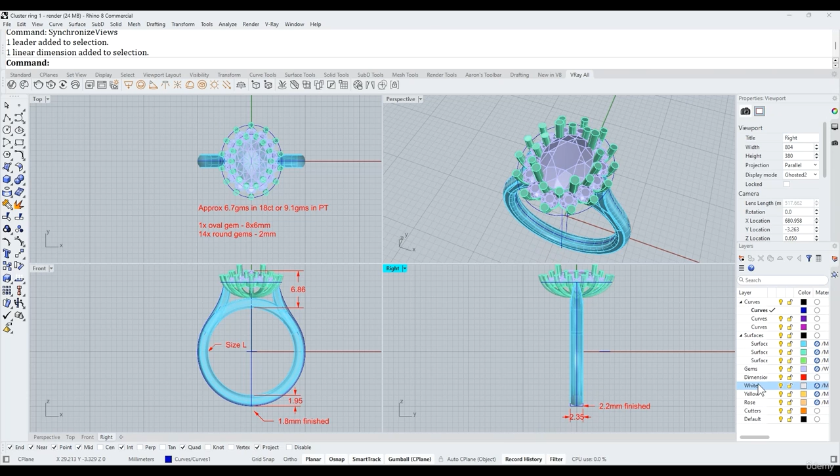I'm going to start by deleting some of the superfluous parts here, being these annotations. Let me select the entire dimensions layer and delete. There's a couple of curves here I'm going to delete, don't need those. I'm also going to delete all of the gems. Now the gems look like they're on the gems layer, but they're actually on the curves layer here, so I'm going to SelBlock. That's just going to allow me to grab all of those and delete them.

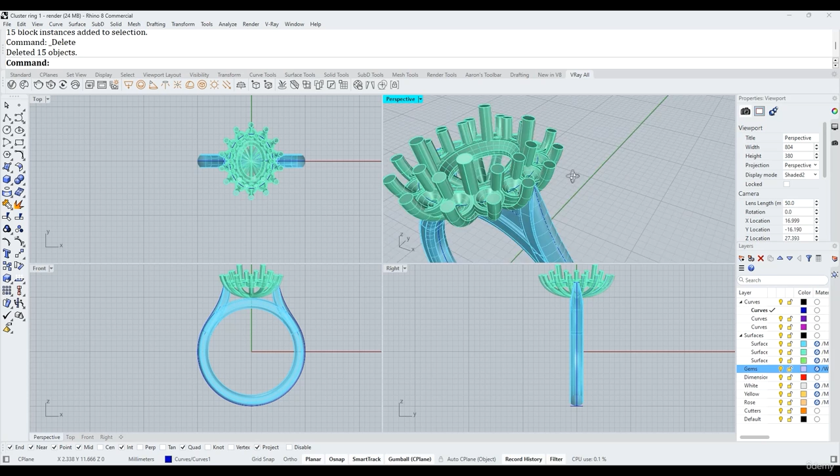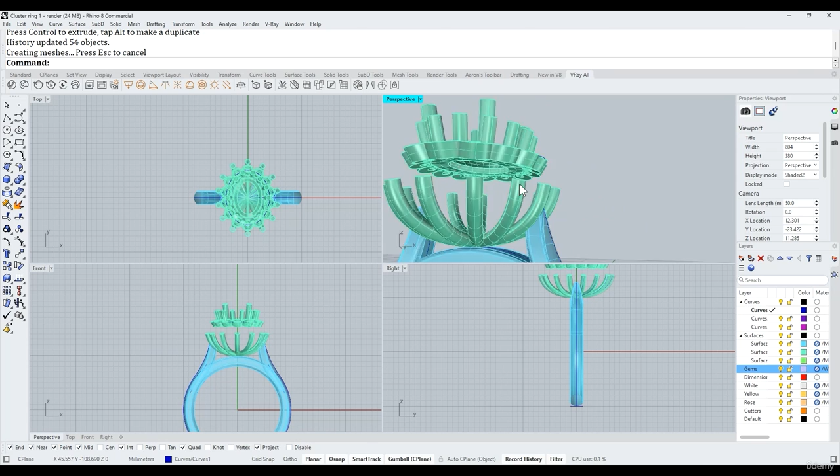So we've got two options here. We can either cast the entire head as one piece and the shank as a second piece, or we could cast everything as one piece, or we can cast the center cluster separately from the wire basket. This way you get a cleaner model, because you're able to get underneath here, you're able to polish up these areas, you're able to disc in between the claws and get a nice polish there. So that's the way I'm going to do it.

I'm going to bring that head back there. I will change the layer just so we can easily see what our three parts are going to be.

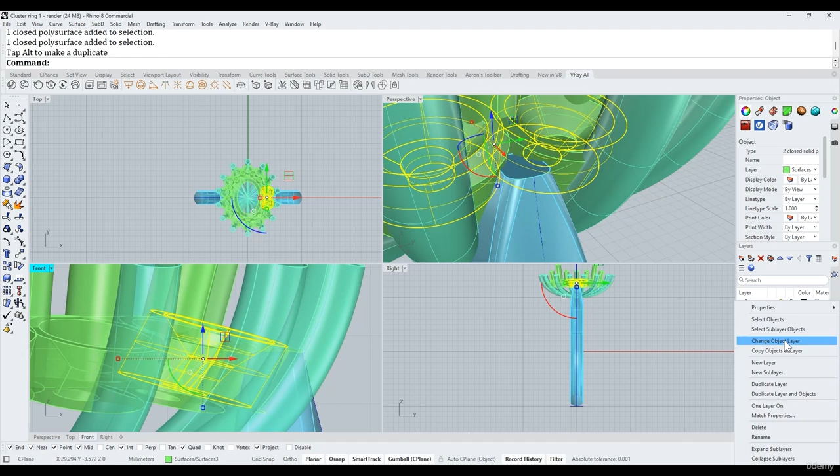Now the tip of the shank here, we do need to trim this back slightly. I'm going to select these two objects here, hold down Alt as I drag - you can see I've got a little plus mark there by my cursor, so I'm making a duplicate. I'm going to put this on the cutters layer, mirror that across to the other side, and then I can do a Boolean difference and delete away the orange cutters.

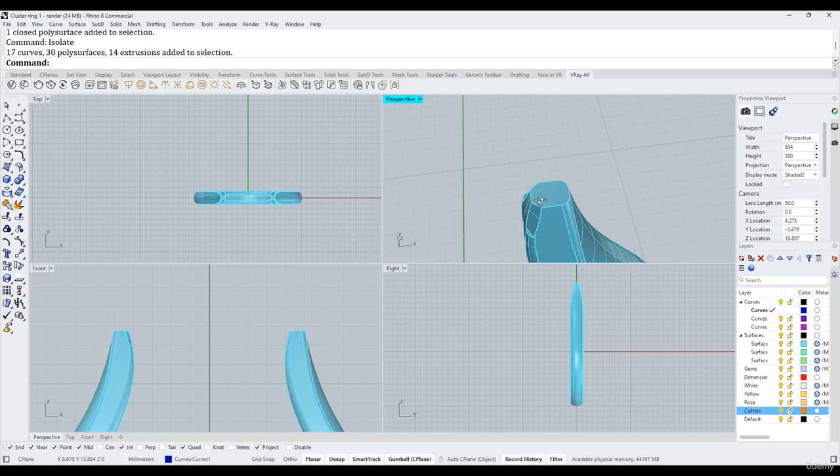And that's just kind of trimmed back a little bit. You can see we didn't need to do much. In fact, you could argue that you don't need to do that at all, but a jeweler can sort of trim this back and make that fit quite easily, but we'll do it anyway.

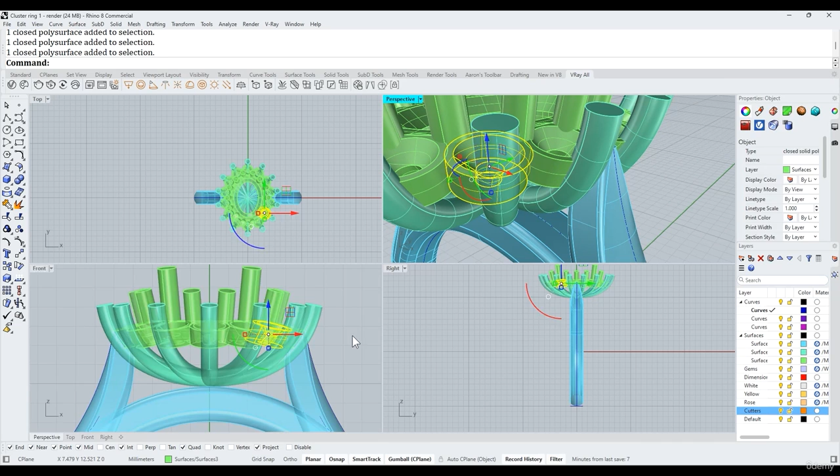The other thing I want to do is I need to Boolean away these claws here out of our under bezel. What I want to do is select all of our geometry here and bring this down a touch, again tapping Alt to make a duplicate. I just want to bring it down - you can see that's about 0.15 millimeters, something like that.

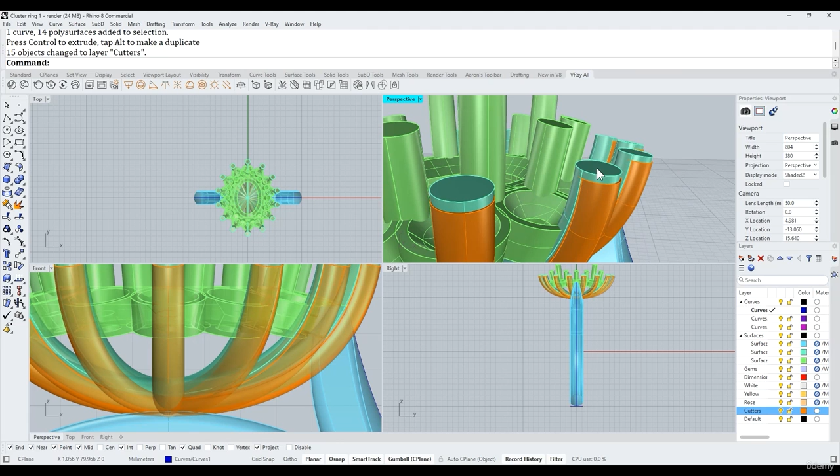With those still selected, again I'm going to put those on the cutters layer. So now I've got two sets of claws, the ones we're going to use and the ones I'm going to use as a cutter. The reason I've done this is because I don't want the claws to cut in as much as what is in the model here. I want whoever's assembling this to be able to drop in a little burr and just tidy that up a little bit, and this is all going to fit nicely. So I don't want to cut in as much, which is why I've dropped these cutters down a little bit and away from our under bezels.

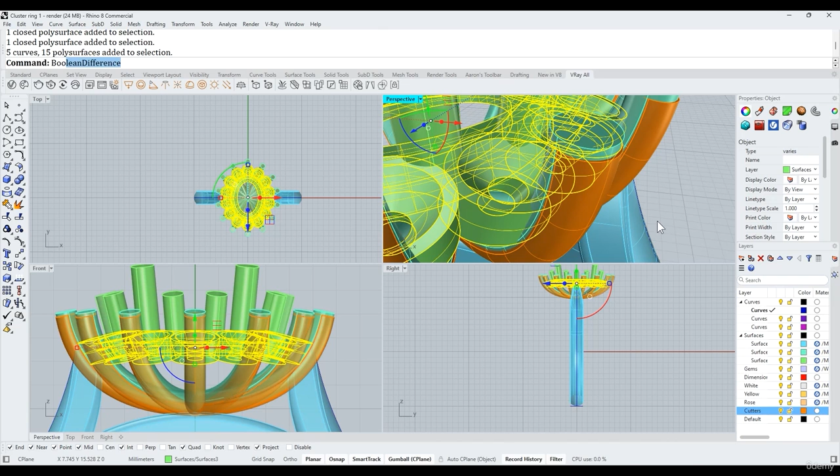So again, Boolean difference - this time I'm going to right click and select these objects here, right click again, and that way I'm doing a Boolean difference using an entire layer. So all of this here is ready to go.

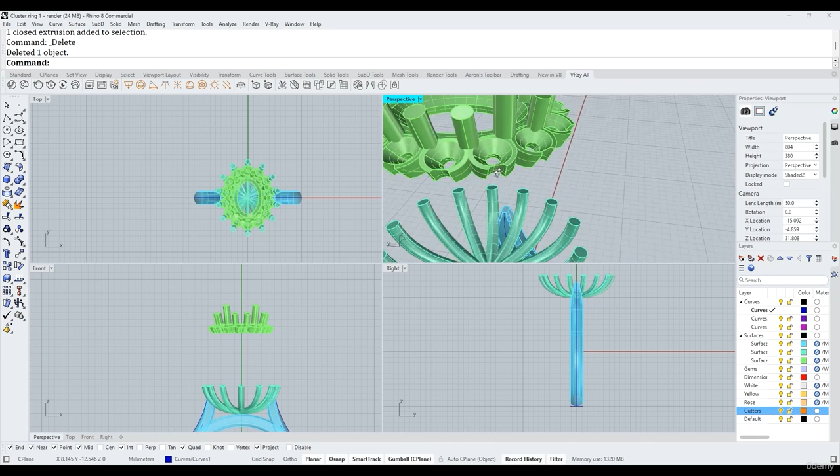I'm going to lift that up into position. Now, if you remember, it does like to add in the claws that we've previously deleted, so I'm going to delete those again. If I want to stop that from happening, I can purge history by using the history purge command. Now whenever I move this, those claws aren't going to reappear.

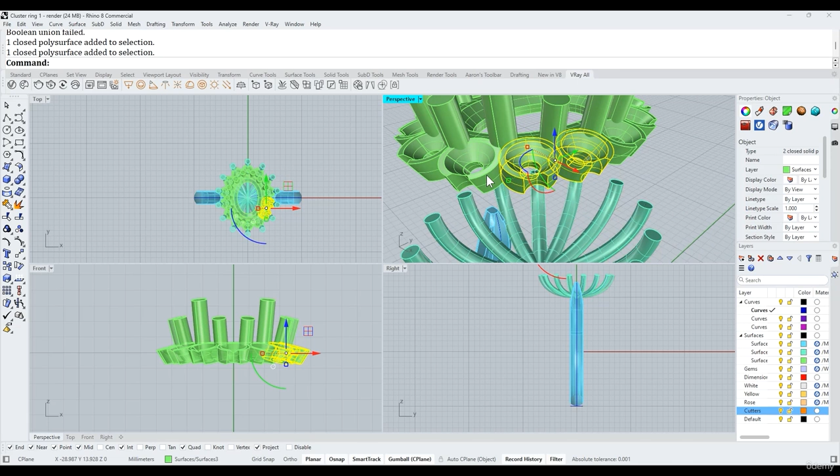I'm going to use a Boolean union just to union that entire top plate together. It looks like I've got a failure, so I'm going to do this individually. Each time I do this, I'm checking that the operation is successful. Now I've got the entire plate there.

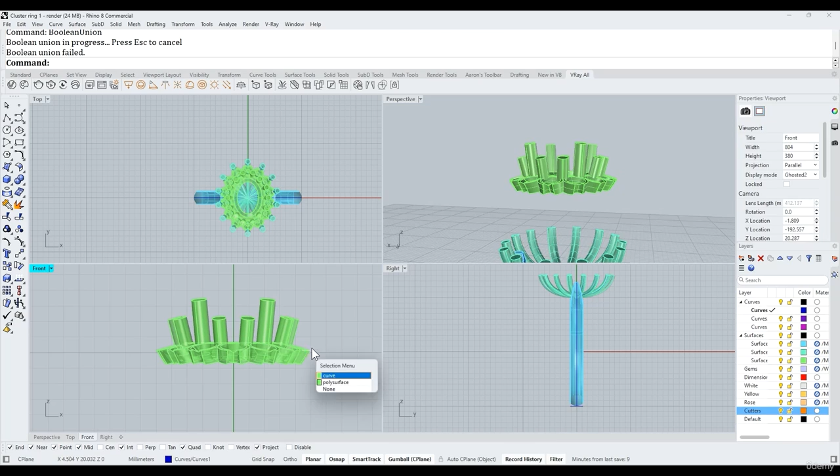I'm going to see if I can do the claws in one shot. It looks like it's failed again. We'll do all four claws there. That's worked. Okay, it looks like I've got some duplicate claws here, which is why that Boolean union is failing.

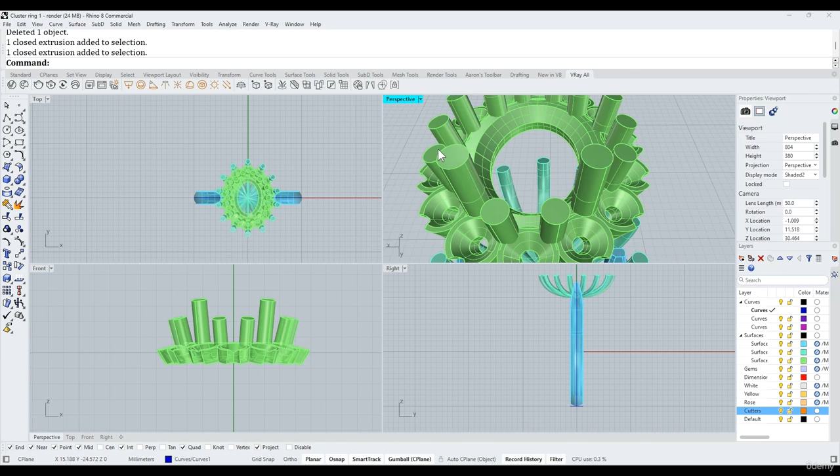So these two here were duplicated. I've got a duplicate here, and that looks like that's all of them. So let's try that again. Okay, this time it was successful. So somehow I've managed to add some extra duplicate claws. I don't know where that's happened, but sometimes if you get a Boolean union fail, that can be the cause of it.

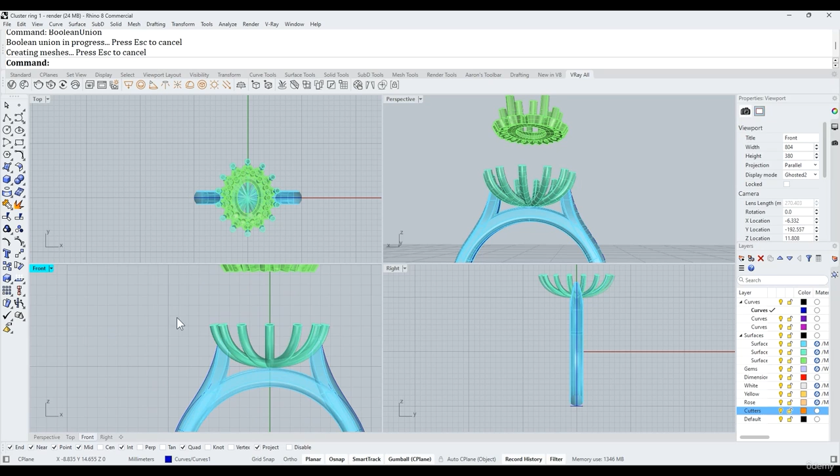The other thing I want to do is grab all of these. I doubt that a union is going to work, but I'll give it a shot. You can see that's failed. I'm just going to group those together and I'm going to purge history.

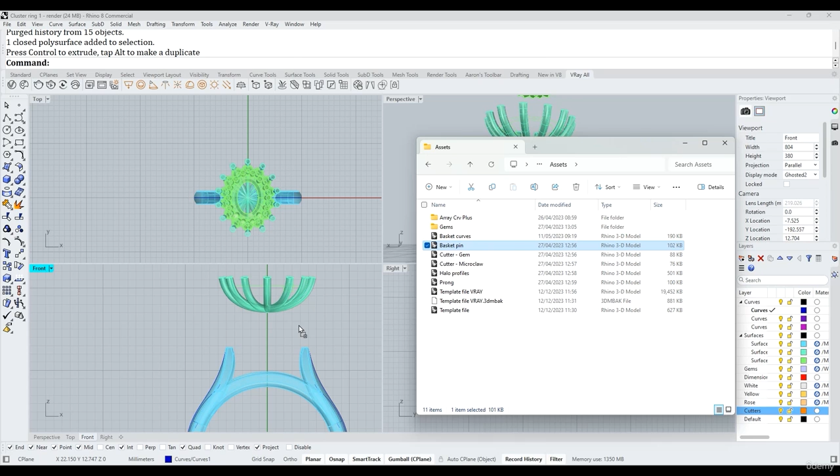I also want my locator, which is going to dive into the bridge here and be attached at the bottom here, my little pin. That's going to be part of the course assets, the basket pin. So I'm going to drag and drop this in and import this in place.

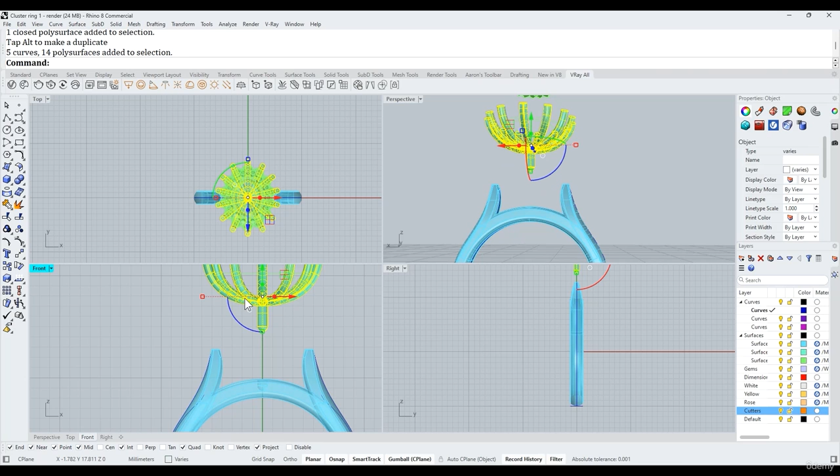Move it up into position, do a Boolean difference. This time I want to keep the cutter, so delete cutters equals no. And then I can move this up into position here, and again just group those together. I'm going to select curves and delete those.

And this is our resulting file. So you can see we've got the scoops cut out of our under bezels here. Those are all ready to receive those claws once that gets up and soldered into position.

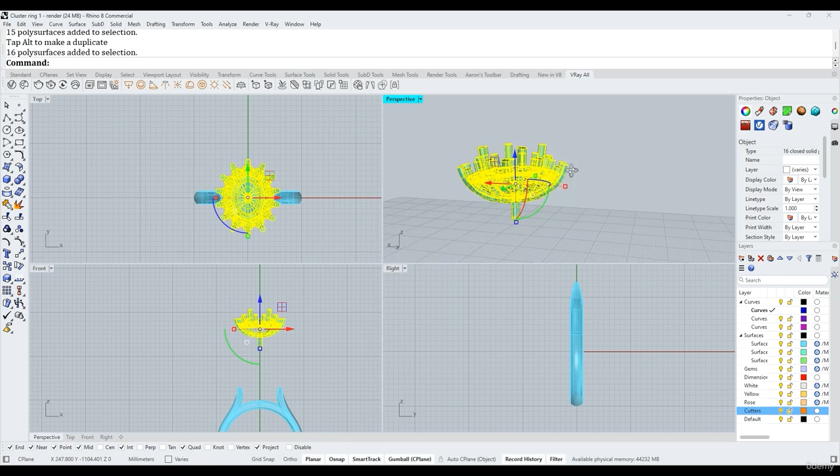Like I said, you could do this as one piece if you wanted. It is going to prevent access to the underside of this head here. So personally, I prefer to do this kind of thing in 3 pieces, but how you want to do it, I guess, is up to you.

Now, once we've got all of these pieces together, I'm just going to type show, make sure that nothing is hidden there, and make sure all of my layers are on, so that I've got nothing on hidden layers. And now I can save this as a production file.

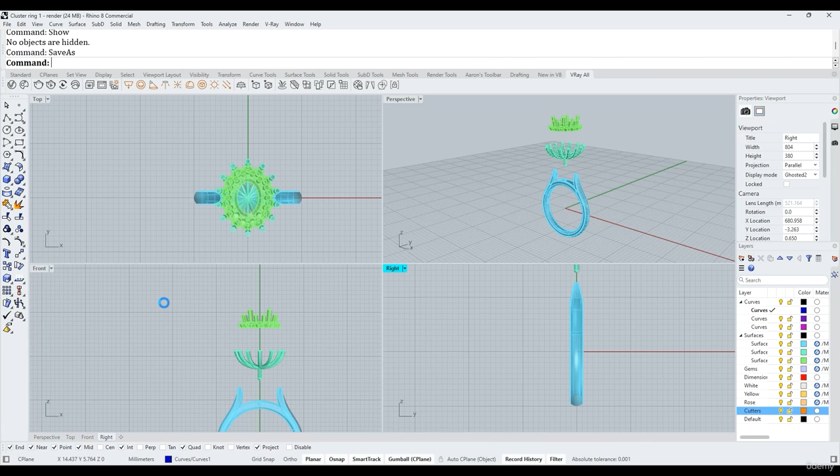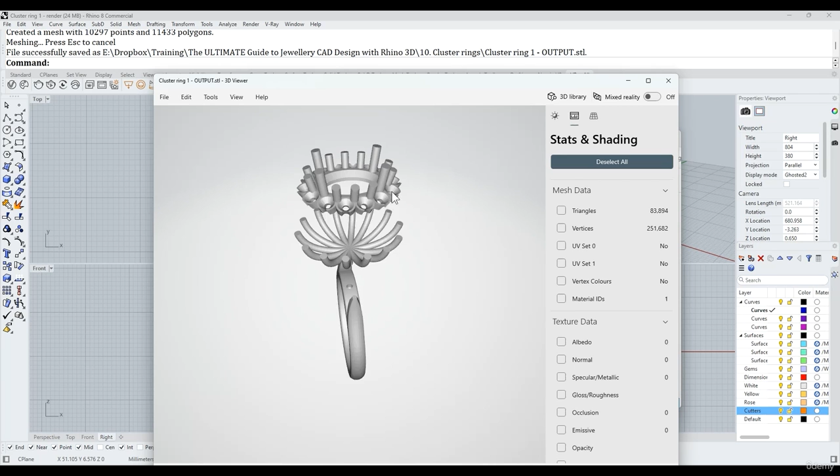Saving that as a 3DM first, and also as an STL file. So with all of that done, I'm just going to double click my STL file, bringing it into our STL viewer, and just have a good check and make sure that everything is looking the way that it should, that I've got all the correct amount of claws, nothing is missing, and nothing is looking strange.

So that is our cluster ring from start to finish. The next video I'm going to do the same cluster ring, but a slight variation on this, where the claws are not on the ends of the gems, but rather shared claws in between them.